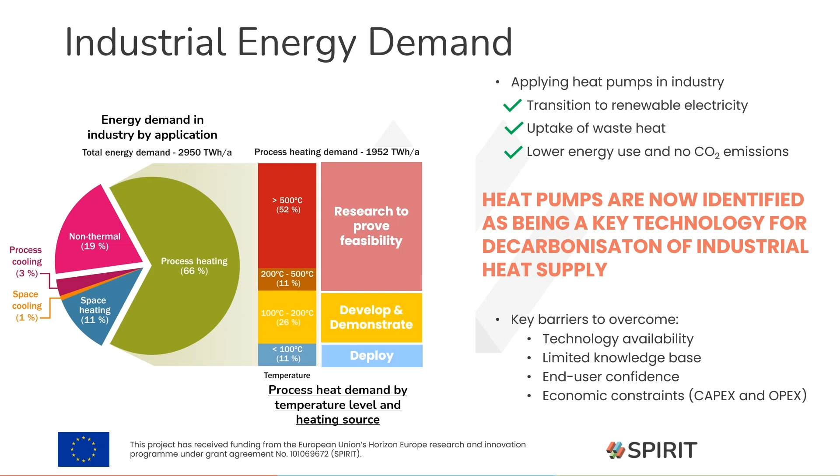So I mentioned in the last slide that heat pumps are now identified as being a key technology for decarbonisation of the industrial heat supply. Just to show this isn't just my opinion, I wanted to provide some references. In the EU Net Zero Industry Act, a framework for accelerating the manufacture and uptake of clean technologies, heat pumps are identified as a strategic net zero technology, along with other technologies such as wind, solar, batteries, and electrolyzers. This means there's significant potential for rapid scale-up of manufacturing to contribute to the EU's decarbonisation targets. We can also look to the IEA, for instance, who recently released a report on the future of heat pumps.

In this report, it indicates that heat pumps, which can efficiently supply heat to industry, are the key technology to make heating more secure and sustainable.

Also from the IEA, they recently released a report for a net zero roadmap for the global energy sector. In this net zero roadmap toward 2050, heat pumps were identified to account for 30% of the heat demand in light industries for 2050. Just to give some context of what that means, this would be equivalent to rolling out 500 megawatts of heat pumps every month over the next 30 years. So clearly, there's a lot of potential, and it's exciting times for heat pumps in the industrial sector.

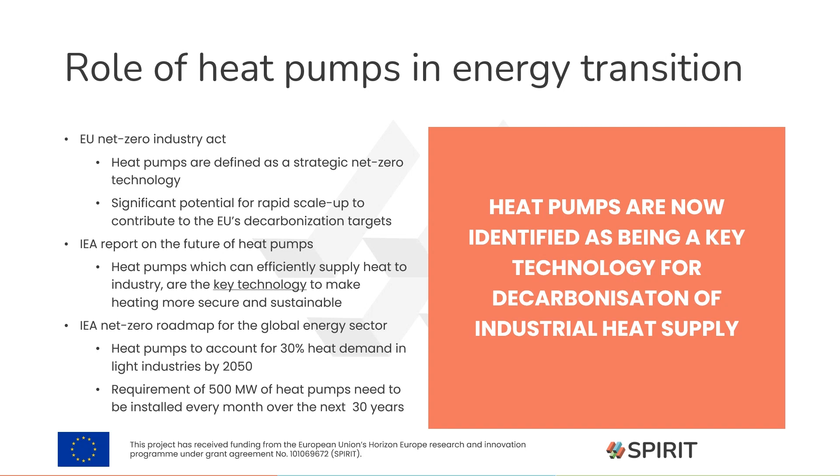The final place where this viewpoint is shared is in the recently released Horizon Europe framework, where we see an increasing number of calls on high temperature and industrial heat pumps. One of these calls was in 2021, titled 'Full Scale Demonstration of Heat Upgrade Technologies with Supply Temperatures in the Range of 90 to 160 degrees Celsius.'

And this is where we submitted the Spirit proposal. Spirit stands for implementation of sustainable heat upgrade technologies for industry. And of course, this project was eventually successful, which was very nice news.

We started working on the project in September 2022, last year. The project has a duration of 42 months and will continue till 2026. We have 17 partners from 8 countries, and the total budget for the project is 11 million euros, I think it's well over that, with an EU contribution of around 9 million euros.

Within Spirit, we have the overarching objective to establish heat pump technology as the reference low carbon technology for industrial heat supply less than 160 degrees in 2030, by carrying out the following sub goals or objectives.

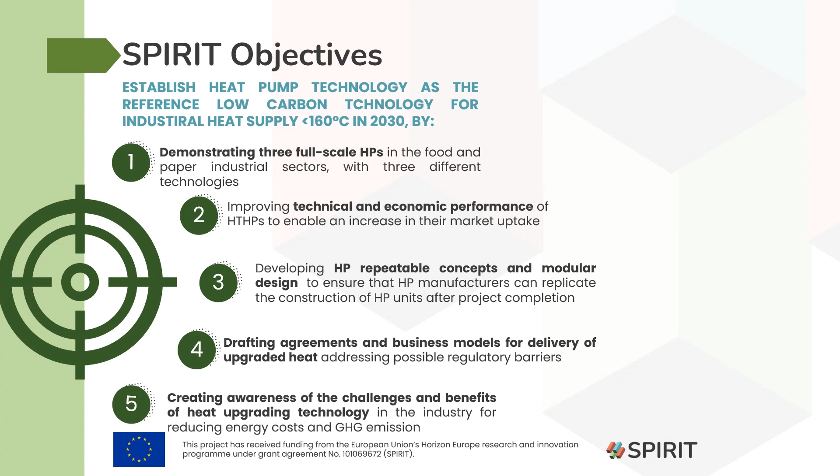As a final point, it's really our ambition as part of Spirit to take the learnings that we have from this project and disseminate it to a wider audience. So we really want to say not just what the benefits of industrial heat pumps are, but we also want to identify or inventorize what the challenges are for heat upgrade technologies and how we can overcome these. I think that's a really important part as well.

In terms of the consortium that will work on these objectives, what we've tried to do is incorporate all sorts of areas of the value chain. So what you can see here is, in the first instance, we have technology suppliers. For instance, we have

the heat pump manufacturers such as Spilling, Mayekawa, and GEA. We also have TVP Solar involved in the project, which manufactures vacuum plate solar collectors. So we want to see about the ability to incorporate solar thermal heat combined with heat pumps into the process industries. We have 3 end users involved in the project, namely Smurfit Kappa, Stella Polaris, and Tiense Suiker, where the

heat pumps will be demonstrated. We also have a number of knowledge providers, which will support the manufacturers and the end users in this. For instance, we have TNO, DTI, and DLR, which are heavily involved in the demonstrations, but also in technical developments. We have Danish Technical University, which will be involved in looking for the replication potential for this technology in the district heating sector, and TLK Energy, which will develop integration and heat pump design tool chains, which will be available to the public, which take a lot of the learnings of Spirit and incorporate it into those design and integration aspects.

We also have parties on the business support aspect. Synlock will develop the innovative business models, as was discussed in a previous slide, and we'll have Eurek Research conducting a market study for industrial heat pumps under different scenarios and seeing how that market will evolve moving towards 2050.

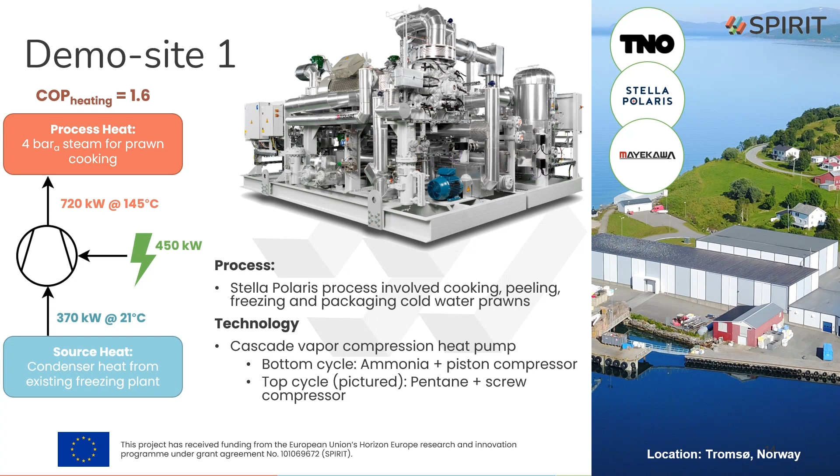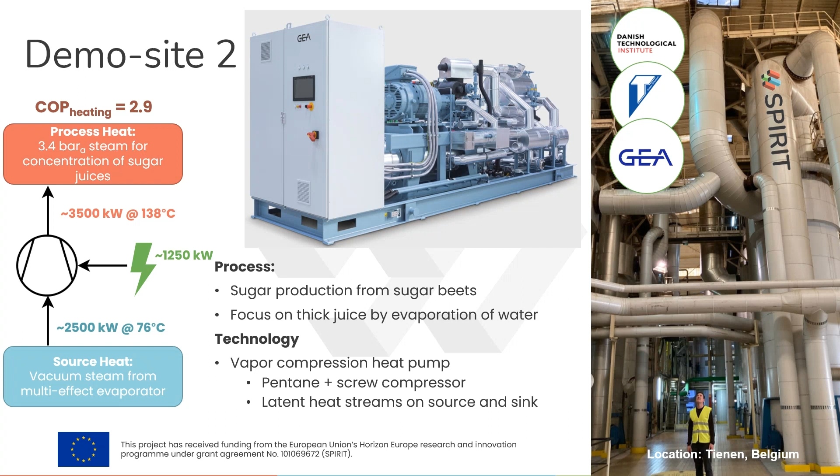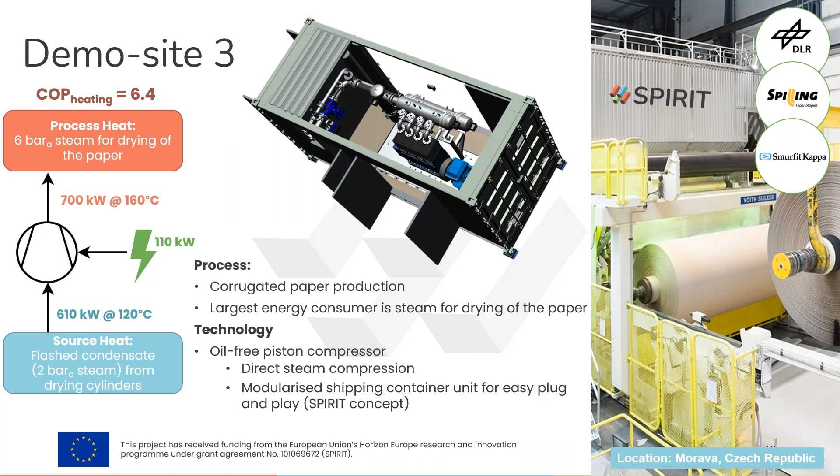I hope this is giving a nice introduction to the Spirit project in a public forum.

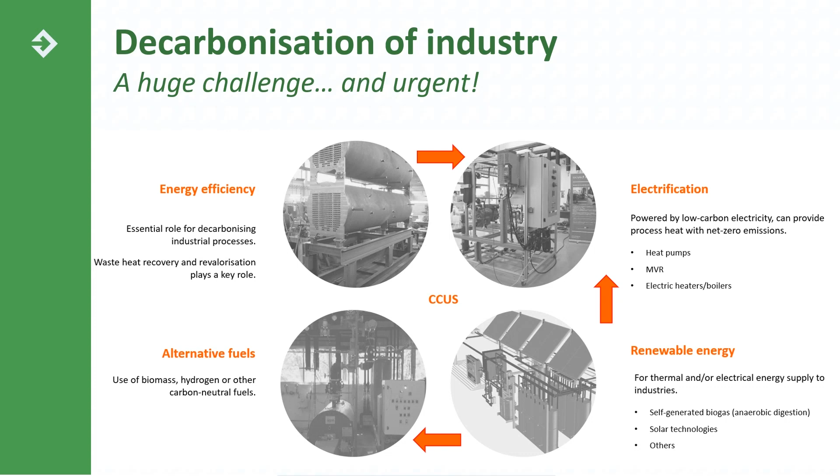Industry plays a key role due to its high portion of CO2 emissions coming from industry, and as well, as Andrew has said, high temperature heat pumps can be key. One of the technologies, together with other technologies, other energy interventions and other energy actions, it can play - it can be one of the key enabling technologies towards the achievement of these decarbonization objectives.

Not much to say here, Andrew has said it already. We are talking about using a technology that can make use of some heat sources that otherwise are wasted, to produce heat that can be used in the processes, industrial processes, just reducing the energy consumption from fossil fuels.

Maybe just to add something else - I think we are talking about a cross-sectoral technology. We are not just improving the energy efficiency, but as well, at least when talking about electricity-driven heat pumps, it helps to use more sustainable, greener electricity.

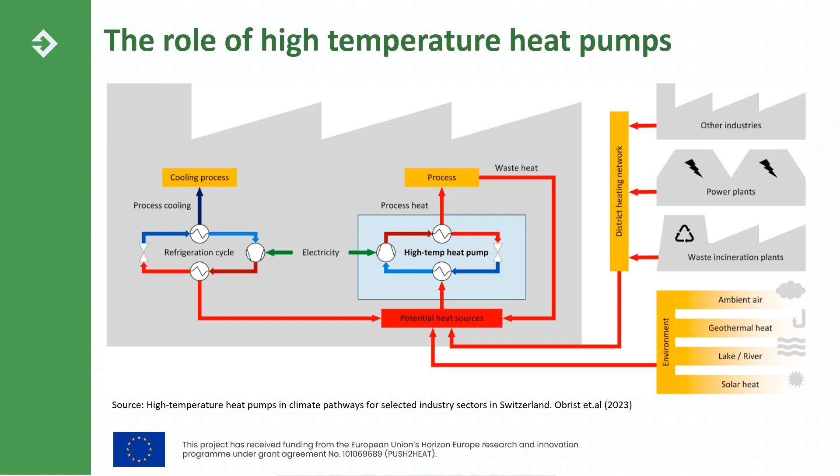Well, probably we all know about the main benefits that are linked to these technologies, so I'm not going to extend much on this, just a couple of figures before going more into details about the Push to Heat project. From one hand, talking about process heat, around 37% of the process heat required by all industry in Europe is below 200 degrees centigrade. So we have a lot to do here.

Depending on the output temperature, the maturity level for high temperature heat pumps is not the same. It's not the same if we are talking about delivering heat at 120 degrees centigrade or delivering heat at 200 degrees centigrade.

So the maturity level is different, but there is a kind of agreement that heat pumps can be a powerful, strong technology to tackle this process heat up to 200 degrees centigrade, more or less. And we see that the market potential, or the amount of process heat that we can reach through heat pumps, is really high. On the other hand, regarding available waste heat, it's not easy to estimate this, but there are some studies estimating this available waste heat in the industry.

In fact, I have taken this study that comes from TNO, and they estimate that there is more than 200 terawatt hours of waste heat between 40 and 100 degrees centigrade. So heat pumps are like a perfect match between these. We have a lot of waste heat available. We have to decarbonize the thermal processes. So let's do it. But the truth is as well that the potential seems to be high, but still the actual market is not too high.

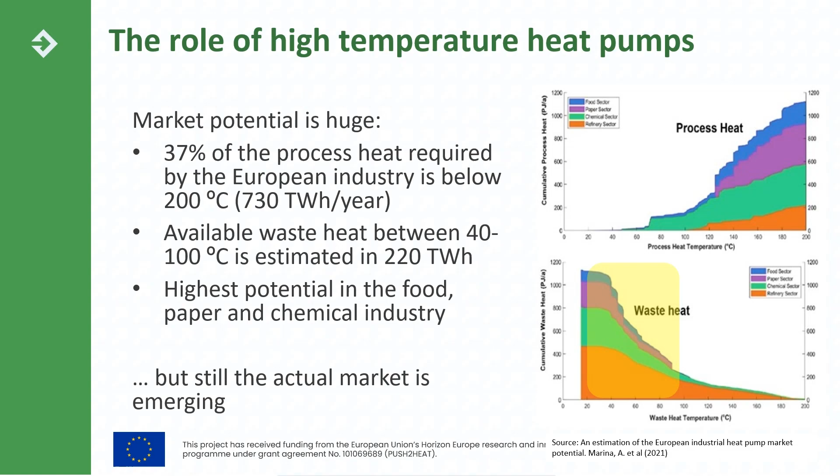Let's say that it's emerging, and probably many people that are here today in this event know better than us that there has been a change in the market trend in the last couple of years. It seems the interest in heat pumps from end users and from the different companies in the value chain is increasing a lot. So it seems there is a change. But still, the truth is that the actual market is not so high, but the potential is there and the need as well. So I would say this is a little bit like the starting picture for the Push-to-Heat project, and it was conceived based more or less on this framework.

So I'm going now to focus a little bit more on the project itself. I have summarized a lot the objectives of the project, and I would say we have two main pillars. Of course, we are talking about technology, so it's a technological project, but not only. We are considering 4 different heat upgrade technologies. I will talk more on this later. So we are talking about improving the technologies. We are not developing new technologies, but we are talking about optimization, upscaling, further improvement, or whatever.

But, as said, it's not just a scientific or technological project. We also want to tackle very clearly market and business related objectives. So the idea is to push forward this market potential that I have just mentioned, that in principle is high, working on new business models and any action to help these technologies deploy in the market in the next years. So these are the two main pillars of the project, but at the end of the day, the core activity will be the demonstration of 4 full-scale pilot plants in different industrial applications.

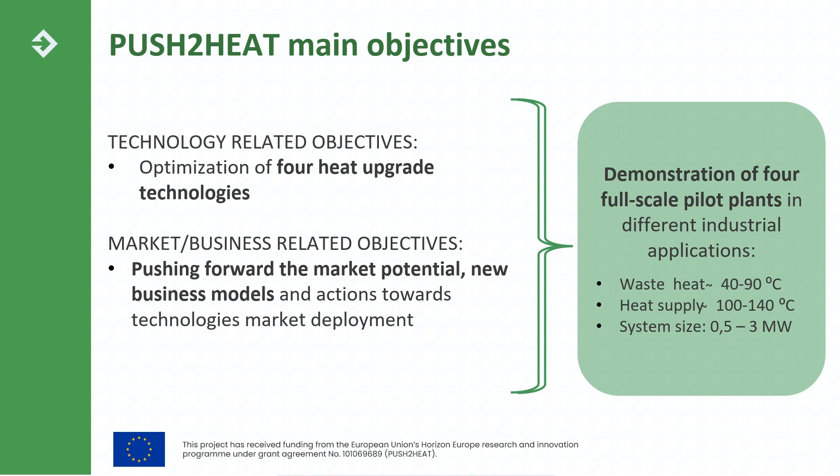And in summary, the main features are these ones that we see here. Regarding waste heat, we are using waste heat from 40 to 90 degrees centigrade. Regarding the heat supply, we are talking about delivering heat at between 100 and 140 degrees centigrade. And regarding the system size, we have demo sites starting from around 500 kilowatts of delivered heat up to around 3 megawatts. Okay, so this is an overview of the main objectives.

And regarding the involved technologies in the project, as said, we are considering four different technologies that will be provided by four manufacturers, and we are considering electrically driven heat pumps, but also thermally driven heat pumps. In electrically driven heat pumps, these are the vapor compression cycles. On one hand, the manufacturer SPH from Germany will provide a vapor compression heat pump with a piston compressor. On the other hand, we have Enertime from France, that will provide vapor compression heat pumps with turbo compressor, so for larger scale.

And in thermally driven heat pumps as well, we are considering 2 different technologies. On one hand, an absorption heat transformer with water lithium bromide as working fluid by BS-NOVA from Germany, and also a thermochemical heat transformer by Q-Pinch from Belgium. Yeah, and this is an overview of the technologies that are involved and will be demonstrated in the project.

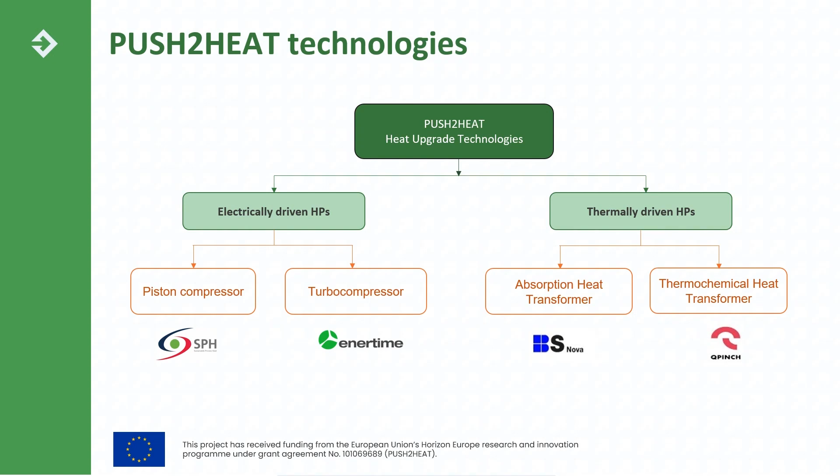Okay, and then regarding the demo sites, we have 4 technologies and we have 4 demo sites, 1 demo site for each technology. So one of them will be implemented in a paper industry in Germany, in the city of Weissenborn, and the plant owner is Felix Schoeller Group. And here the heat pump by SPH will be the one that will be demonstrated. The waste heat source will be exhaust heat from the paper machine dryer.

So they have a glycol circuit already implemented from the exhaust humid air heat recovery circuit, and they were already using this heat for space heating, but still they have more waste heat available. So the idea is to use this waste heat to activate this heat pump to produce low pressure steam at 1.8 to 2.2 bar approximately. So here we are talking about quite an important temperature lift, probably not as high as one of the demo sites that has been explained by Andrew and is part of Spirit, but a temperature lift of 80 Kelvin more or less.

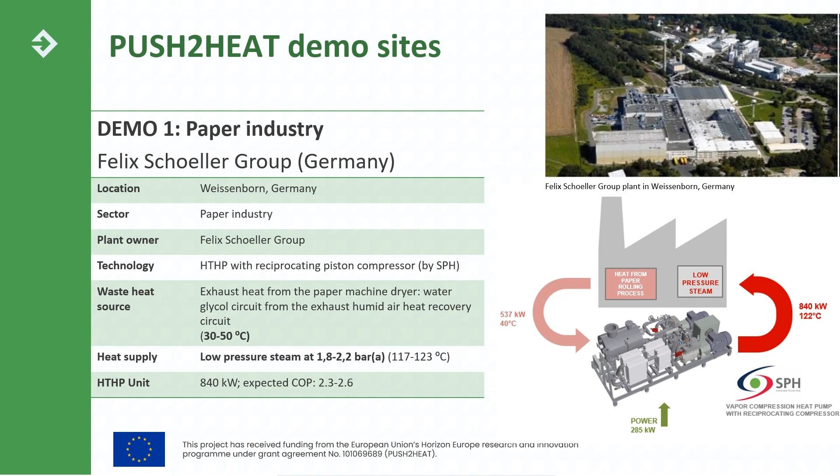And of course, this is translated into the COP as well, but it's expected to have quite an interesting COP. As you know, we are still in the initial stages of the project, so we are still doing the first assessment, energy system concept and so on. So the accurate results will come later on, but we expect a COP around 2.3, 2.6, more or less. And regarding the size, we are talking about a high temperature heat pump unit of about 840 kilowatts of delivered heat.

Okay, we have another demo site. This one will be implemented in Lazio in Italy, close to Rome, in the plant owned by Cartiera di Guarcino, also paper industry. And here a heat pump of around 2.8 megawatts will be implemented, provided by Enertime. In this case, it's a paper industry, and we are integrating it, of course, in the processes. But what I wanted to say is that the waste heat is coming from cooling water of the CHP plant, the cogeneration unit that they have to deliver the electricity and steam that they use.

So it's a paper industry, but this can be replicated a lot in many other industries. They have a lot of waste heat available. So the idea here is to use around 2 megawatts of this waste heat at 89, 90 degrees centigrade, more or less, cooling water. This will be used to activate the heat pump, and the heat pump will produce low pressure steam. Here we are still defining the concept for the energy system regarding how this steam will be used. So far the idea is that part of the heat will be produced at 1.8 bar of steam, and another part at 3.6 bar.

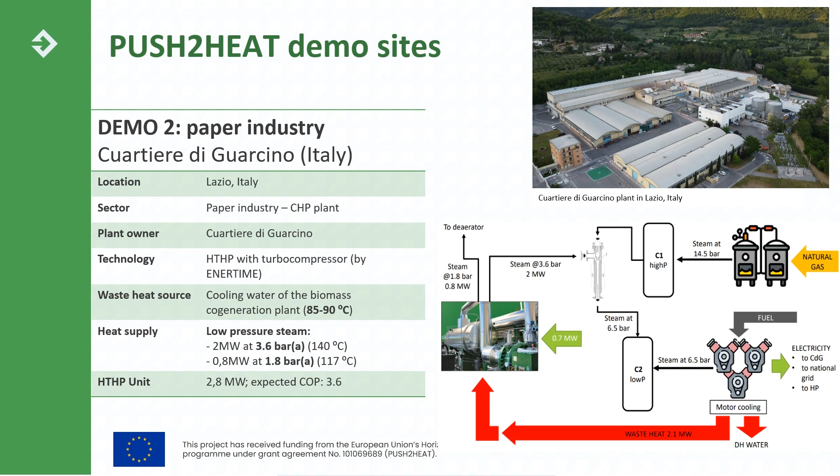So we are still working on this, and let's see in the upcoming months which is the final solution. And here the expected COP is around 3.6, which is a very interesting COP. This is an overview of this demo site. Okay.

The third one will be located in the city of Santander in the north of Spain. It will be implemented in a chemical industry owned by the company Dynasol. And here the technology that will be demonstrated is an absorption heat transformer by BS-NOVA. And the waste heat, here again, we are still checking different alternatives, and it's not fully clear where the pilot plant will be located, because there are two waste heat sources that are very interesting to be used. So that will be decided in the next months.

But the idea is to use a waste heat source that is in the range of 85, 90 degrees centigrade. It will be heat from a condensation process.

So taking this heat, this will be around 1 megawatt of waste heat at around 85 to 90 degrees centigrade. This will be used to activate the absorption heat transformer, and we will get as an output around 500 kilowatts of heat. Depending on where it is finally decided to implement this heat pump, the delivered heat will be used to preheat the chemical product up to 110 degrees centigrade, or can also be used to generate steam and introduce it in the process.

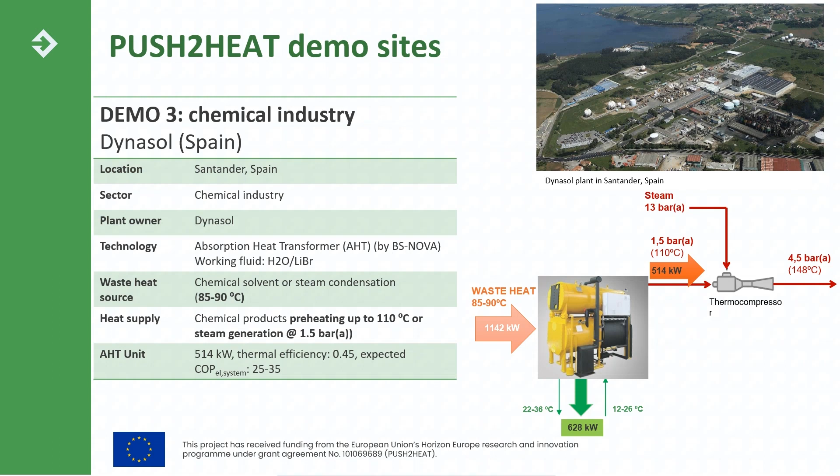Okay, and the fourth one, the demo site linked to the thermochemical heat transformer. This will be a little bit different, also because the story behind the technology is different, and I will talk on this a little bit now. The test for this technology will be done in an R&D plant owned by Qpinch. Qpinch is in fact the manufacturer of the thermochemical heat transformer. So they have these facilities, and the test will be done there.

So here the story is different. The story is that this thermochemical heat transformer is commercially available, but in principle is more suitable for higher temperature levels than the one that we are considering in the PUSH2HEAT project. There are already some installations all around the world that can take waste heat above 100 degrees centigrade and deliver heat above 150, up to 200, or even higher. So this is the most common place for this technology.

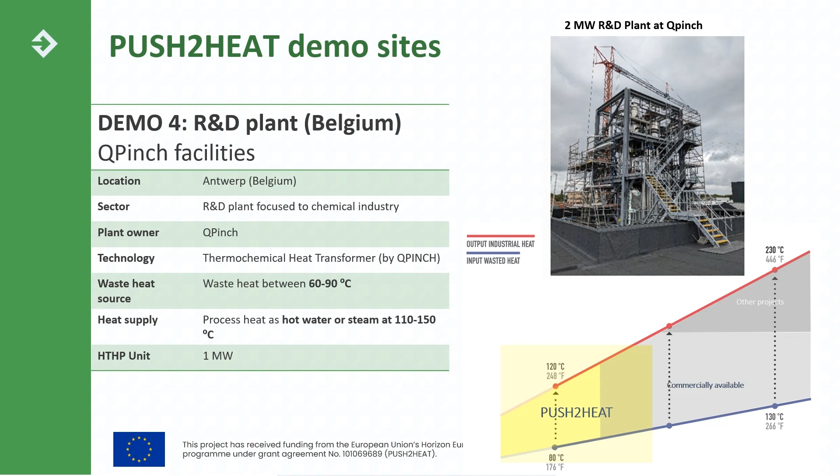Okay, just to finish, this has been an overview of the project and the demo sites as main activities, and I would like to mention a couple of issues before saying goodbye. On one hand, I would like to say something about replication studies. Within the PUSH2HEAT project, the project partners will do some techno-economic feasibility assessments focused on the technologies of the project. What we want is to do this analysis in real cases, not just under generic boundary conditions, but real processes, real boundary conditions.

So if any of you would be interested in doing these replication studies in your plants, in your processes, we would be more than happy to have you on board. Of course we would need some input data, but the study would be for free from project partners to the interested ones. So in case any of you are interested in exploring this opportunity, please contact me, and without any commitment, let's talk about it.

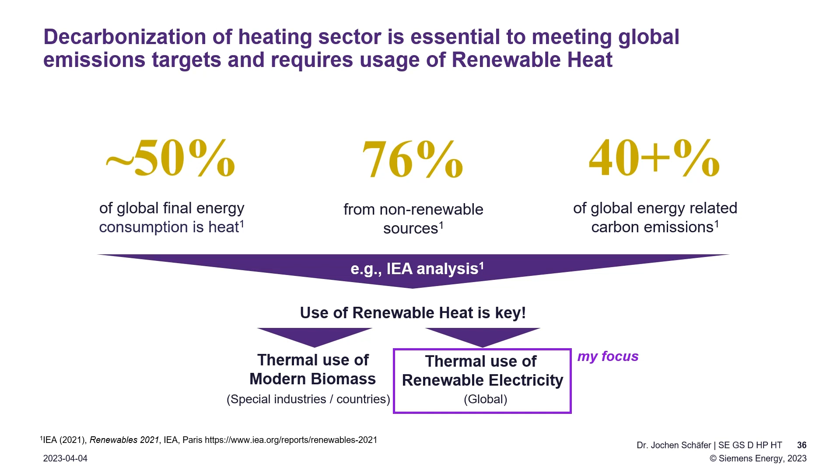So first of all, if we talk about using electricity for heat generation, it's important that we agree on the means of efficiency. So if we want to measure this efficiency, there's a so-called coefficient of performance, which is the ratio of thermal energy at the useful temperature level over the electrical energy that we have to invest to get this thermal energy.

In the public discussion, there are basically three options that are discussed for the future. One, let's call it the reference option, is the electrical heater. There it is a direct conversion of electricity to heat, and the coefficient of performance is about 1.

There is also a discussion of using hydrogen for heating purposes, or even power to X products, like synthetic methane or something like this for heating purposes. There we have to bear in mind that the coefficient of performance will be smaller than 0.75, because we have to incorporate the energy or efficiency factor of the electrolyzer, and after that we can burn this new product, and the efficiency in this term is rather poor.

The smart way, or the energy efficient way, of using electricity for heating purposes is that we use heat pumps. In heat pumps, we use the electricity to pump heat from a lower temperature level to a higher temperature level, and that's why the coefficient of performance can be between 2 and 6, for instance. This is in good agreement with the principles of thermodynamics, because it's really only the electricity that is driving energy, for instance driving a vapor compression heat pump, and here you can basically see the sketch.

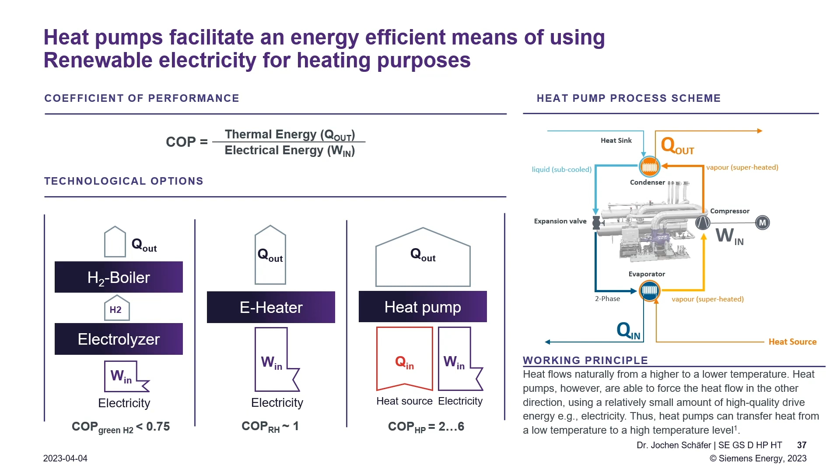So what is Siemens Energy doing about it? To illustrate this, I brought a little sketch. You can see on the y-axis the temperature level, and on the x-axis is the thermal power. Basically we as Siemens Energy start in the single megawatt power range, going up to 70 megawatts per single unit.

With our so-called low temperature heat pump portfolio, we go up to 100 degrees C, and with a high temperature portfolio, we go up to 150 degrees C. Moreover, we have an in-house portfolio for steam compressors, and using the steam compressors, we can then further increase temperature and pressure to about 55 bars and 270 degrees C.

So in summary, we start at about 7 megawatt. We can go up to 70 megawatt with a single unit. We can go up to 150 degrees C with our regular, let's say, high temperature heat pumps.

We selected the working fluid in a way that it has a low global warming potential and zero, or almost zero, ozone depletion potential. We know that there is a critical discussion on synthetic refrigerants, and we as Siemens Energy clearly commit to sustainable business, and we will offer heat pumps based on natural refrigerants as an alternative. However, we see that especially with respect to safety properties, the synthetic refrigerants have been developed such that they have, for instance, no flammability and lower toxicity, and this is something that is very nice for an application.

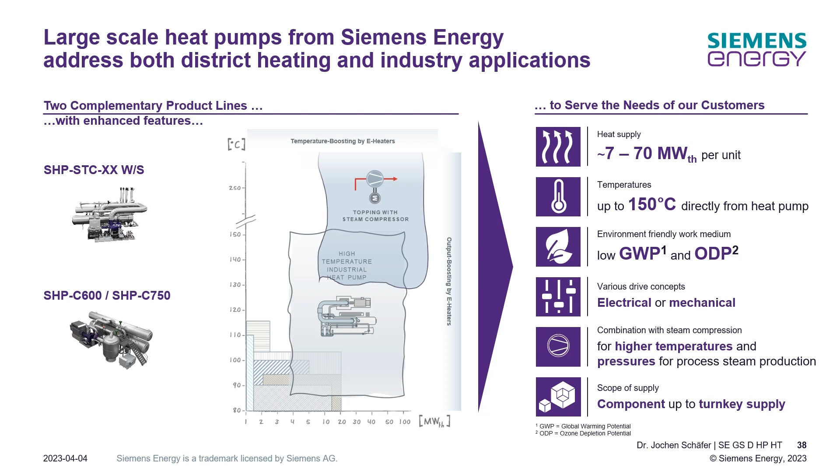We do this development and market it basically for two large market segments. On the one hand, we have the process industries, and on the other hand, we have the continental district heating systems with forwarding temperatures that are higher than 100 degrees C in winter times.

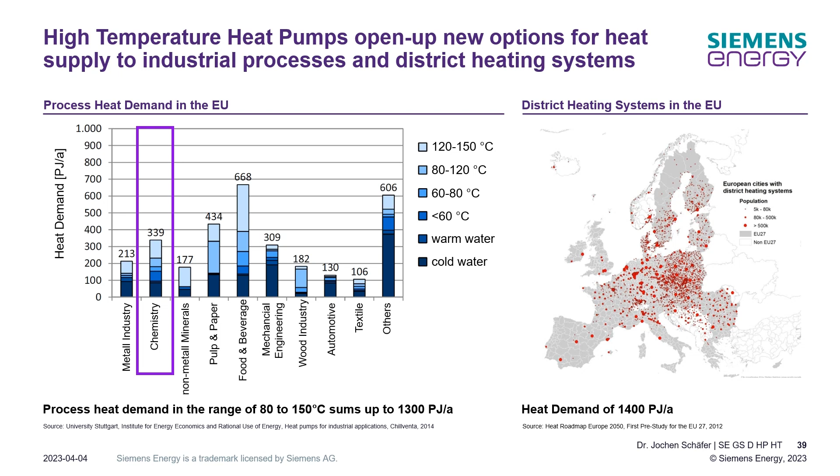But I promised to give you some more details on heat pumps plus subsequent steam compression, and there I prepared some slides showing a case in chemical industries. So let's have a look.

First of all, here on the left-hand side, you can see this is basically the high temperature heat pump cycle. We take some waste heat, for instance, cooling water coming back from a chemical reactor, or cooling water from an entire site primarily going to a cooling tower. We cool it down, and afterwards we can do some feed water preheating whenever there is this option.

We have the high temperature heat pump cycle here, and we produce low pressure steam, something like 1.5 bar.

Steam, and then we have a subsequent steam compression. We do this if needed in a multi-stage arrangement, and we can also do intercooling. Finally, by the last spraying of water, we can really adjust the steam parameters to the parameters that are needed by the customers.

An arrangement such as this has significant advantages. First of all, we can reduce the overall efficiency loss and therefore reduce the primary energy uptake. We can use electricity as main driving energy instead of fossil fuel. Doing so, we can reduce the CO2 emissions, and we reduce the dependence on fossil fuels, which is an additional nice feature given this geopolitical situation that we have so far.

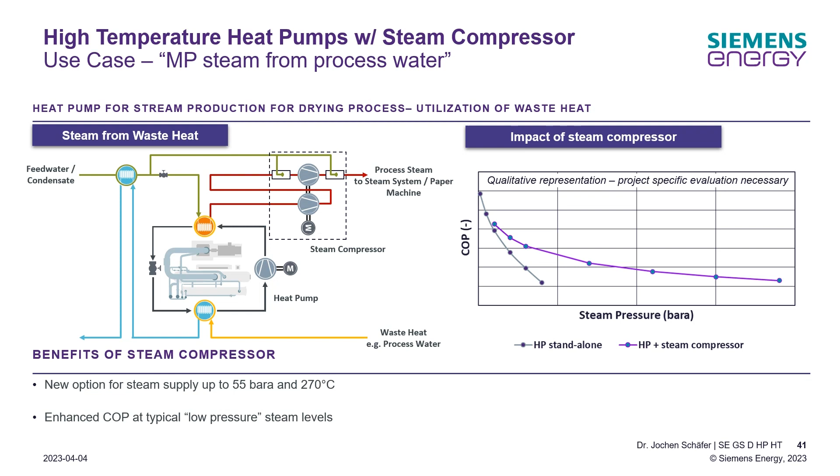Let me summarize my point. First of all, the electrification of the heating sector is key to meeting global emission reduction targets. Heat pumps allow for energy efficient decarbonization of the heating sector. High temperature heat pumps facilitate low carbon heat supply to district heating systems and process industries, and the subsequent steam compression opens up new possibilities for steam supply up to 55 bars and 270 degrees C.

Siemens Energy has, for the low temperature heat pump, a significant track record, and we have advanced products for heat supply at higher temperatures. We would like to be your one-stop shop here, starting with initial assessment of your heat sinks and sources, going up to a heat pump plant that is ready for low carbon operation. So that's what I wanted to tell you, and I'm looking forward to answering your questions.

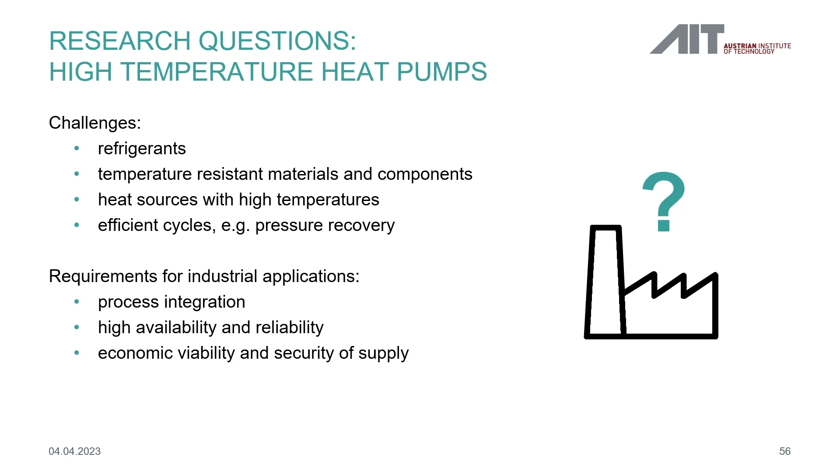First of all, I'd like to introduce you to the DryFiciency Project. This is our flagship project in the field of high temperature heat pumps, where we demonstrated high temperature heat pumps that were able to reach 160 degrees. This project really focused on component development and demonstrating the heat pumps in a real environment.

The third heat pump demonstrated in this project was the research work of our partner in Norway, Sintef. They were working on an open loop heat pump implemented in a biosludge dryer located at Scanship in Drammen.

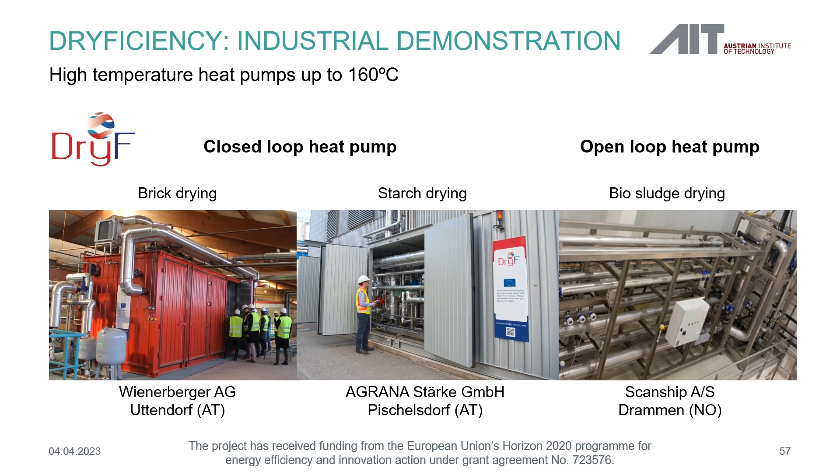This has proven that the component development necessary for these heat pumps was very successful—the compressors, the lubricants, and the refrigerant that was used.

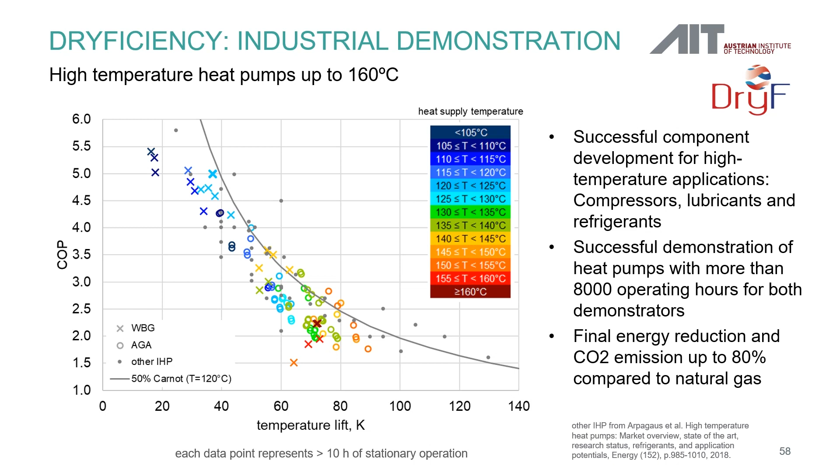I want to show you 3 stages and 3 points of operation in more detail. Starting with the highest temperature at 160 degrees, we had a COP of 2.2.

When we compare this operation of the heat pump with a natural gas burner delivering the same amount of heat, we have a CO2 emission reduction of 62%. We calculated these values using the Austrian electricity mix, which is renewable but not 100% green electricity for the time being. Another important value is the final energy reduction, because this translates into energy cost savings, and this was also in the range of 60%.

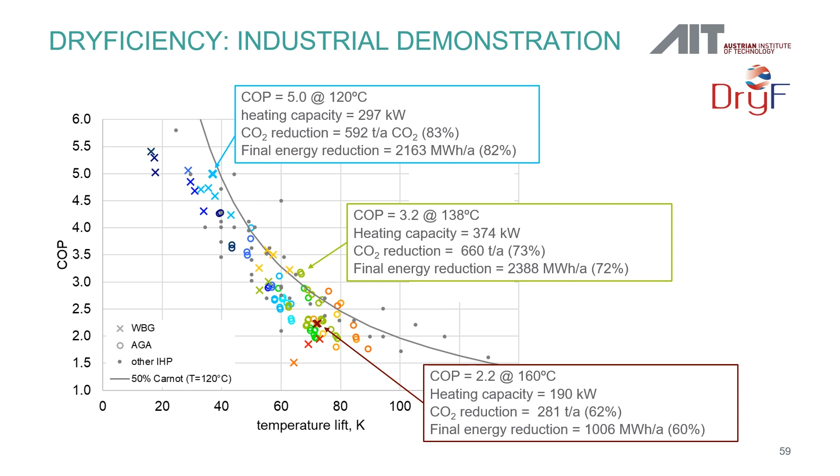When we go to lower temperature lifts, meaning lower supply temperatures while keeping the source temperature constant, we have at a supply temperature of 120 degrees C a COP of 5, which is very attractive. Then we also have very high CO2 emission reductions and final energy reductions in the range of about 80%. This demonstration of the high temperature heat pump was very successful, and it also showed the benefits for industrial companies to integrate a heat pump in their process and make use of the waste heat that otherwise just went into the environment.

We also work on steam generation at AIT, because steam is a major energy carrier in industry, and it has a very interesting multiplication potential because we can integrate those heat pumps that are able to generate steam into existing steam networks, which makes it easier for the end user to switch the energy supply to a renewable source.

We have several options to produce steam with a heat pump. It can be done in the condenser, as we saw in the presentation of Siemens. This is the thermodynamically optimal solution because we have the least number of energy transfer steps — we use the condenser to condense the refrigerant and evaporate the water that is then used as steam in the process. But steam can also be generated in a flash tank, after producing the high temperature with the heat pump. This is also interesting for retrofitting existing water-to-water heat pumps into a steam generating unit. And we can combine it with an MVR system.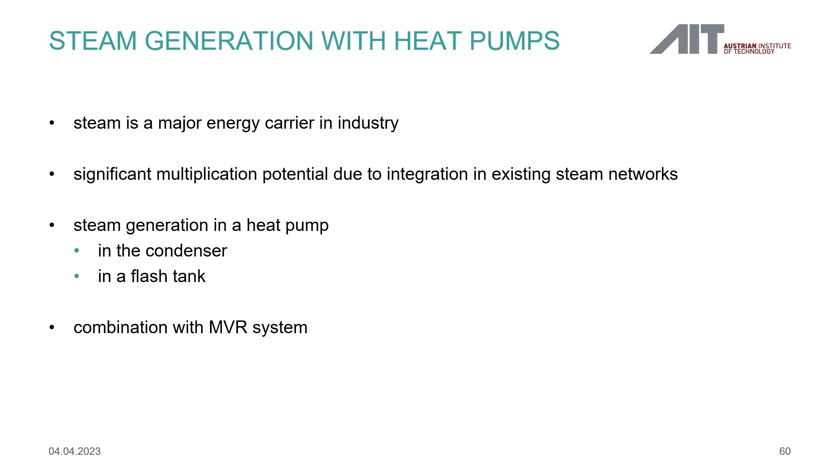I will show you examples of these activities. The first example is the Bamboo project, another Horizon 2020 project where we did a lot of work on steam generation with a heat pump and a flash tank. In this photograph, you see the installation that was set up in the lab of EDF in France. On the left is the heat pump.

It's a water-to-water heat pump operated on a synthetic refrigerant, R1336MZZ, that produces pressurized water. That pressurized water is then used in a flash tank unit especially designed for this purpose, where steam is produced by reducing the pressure of the pressurized water. So part of the water is then evaporated, and the steam can be used for further application.

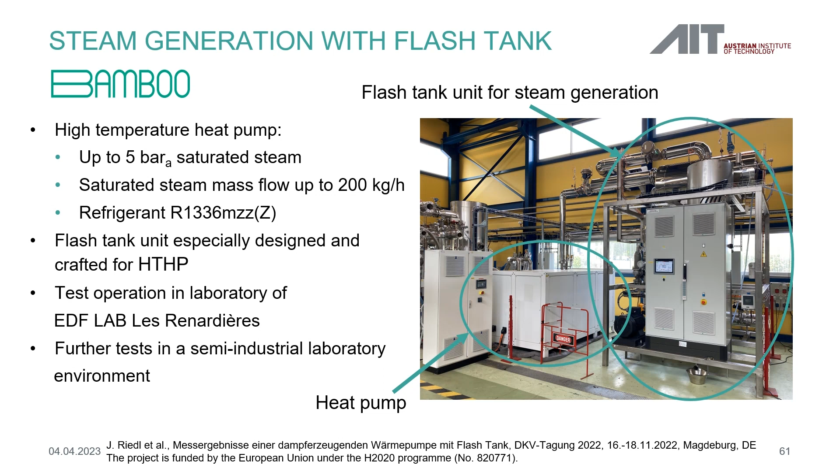With this installation, we have done many different tests to learn about the behavior and the control parameters in this coupled system. In this diagram, you see the steam mass flow on the x-axis and the COP on the y-axis — it's again the heating COP, with the amount of heat delivered divided by the electricity consumed. The colors show the pressure of the steam that was produced, which is basically an indication of the heat supply temperature, since it is saturated steam.

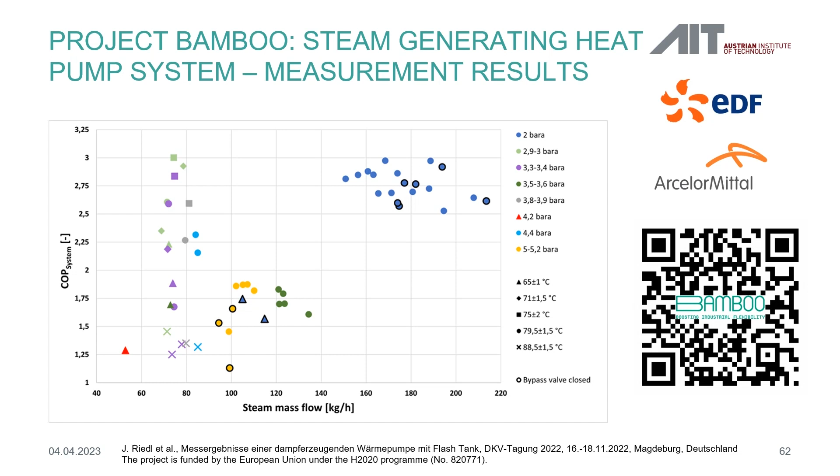The blue dots represent 2 bars, which is 120 degrees C, and the yellow dots are 5 bars, which is 150 degrees C. This was also a very successful demonstration project, and it illustrates how heat pumps that produce hot water can be retrofitted into steam generating units.

Finally, I'd like to introduce our newest project. It's called AHEAD, Advanced Heat Pump Demonstrator. We just kicked it off, starting in December, so it's rather new. There we work on steam production at 11 bar and 184 degrees C based on heat pumps and MVR systems.

This heat pump will be integrated at a production site of Takeda, a pharmaceutical company with several production sites in Vienna, and it will be a major item in their energy supply system. With steam produced by the heat pump, they can reduce their CO2 emissions by 90%, and they can produce totally CO2-free for about 7 months a year. In this project, we will design, set up, and also monitor and optimize this heat pump system for more than 4,000 hours — that's the scientific monitoring.

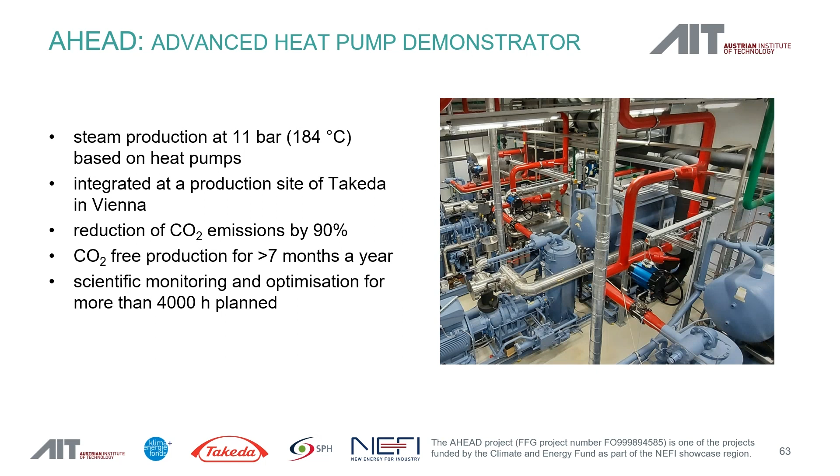Of course, operation will then go on. Here you see how this system looks in theory and what we are going to build in the future. In blue on the left, we have the existing system: they have a central chiller unit where they produce cold utilities, or cold water, for production at a temperature of 6 degrees. The central chiller has waste heat.

So it was equipped with a heat pump, an ammonia heat pump, which produces water for heating purposes at 70 degrees. We use this water at 70 degrees as the heat source for the AHEAD system, which is a combination with a steam generating heat pump. This heat pump is provided by SPH, Sustainable Process Heat, and they will use butane as a refrigerant.

In their heat pump, and the heat pump is based on piston compressor technology. So the heat pump will produce the steam from the water, and then we will add steam compression steps to reach the 11 bar and 184 degrees. The installation will have a heating capacity of 1.7 megawatt, so it's a really big production facility.

And with this setup, we can connect the heat and the cold supply based on a cascaded system of heat pumps that is based on natural refrigerants only. And we will operate this installation with renewable electricity. So this is how this CO2-free production can be achieved.

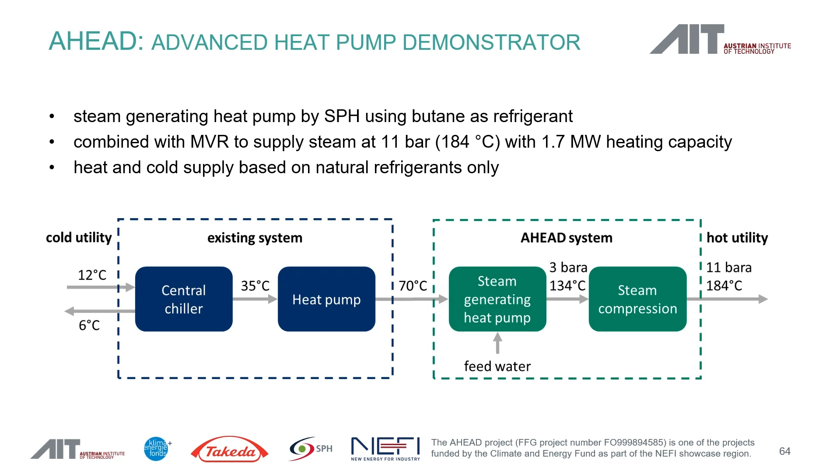This project is part of an Austrian energy model region that's called NEFI. This is new energy for industry. And as a part of this model region, we demonstrate different efficient technologies that are needed to transform the industry into carbon neutral production. And for the end of my presentation, I have brought you another result of NEFI that has been done by my colleagues at AIT and colleagues from University of Leoben. And they work on decarbonization scenarios for the Austrian industry.

So basically, they have defined different scenarios how we can reach zero emissions by 2050. So there were two approaches to get to this result. For the zero emission pathway, this is shown on the right, it was a backcasting approach. So starting from the desired result at 2050, defining the measures that need to be taken to reach that result. The second scenario that's shown on the left, that's called Pathway of Industry. And this was created together with representatives from industry in Austria on the different measures that they are planning to take and extrapolating them to 2050.

So we find different important technology levers in these scenarios. And for today's webinar, the most important one is the one that's listed here in the third place. It's electrification with heat pumps for low temperature applications. So we really find heat recovery with heat pumps in all industrial sectors.

And you can see it also reflected in the results of the total energy demand that is shown in these two diagrams. So the most important section in the bars is the dark blue. That's the electricity consumption. And the diagrams, there's a laser pointer. Great. So this is the dark blue section. That's 2017, 2023. And here we have 2050. And when we compare these levels, we see a doubling in the electricity consumption, and that's not only, but also based on the use of heat pumps.

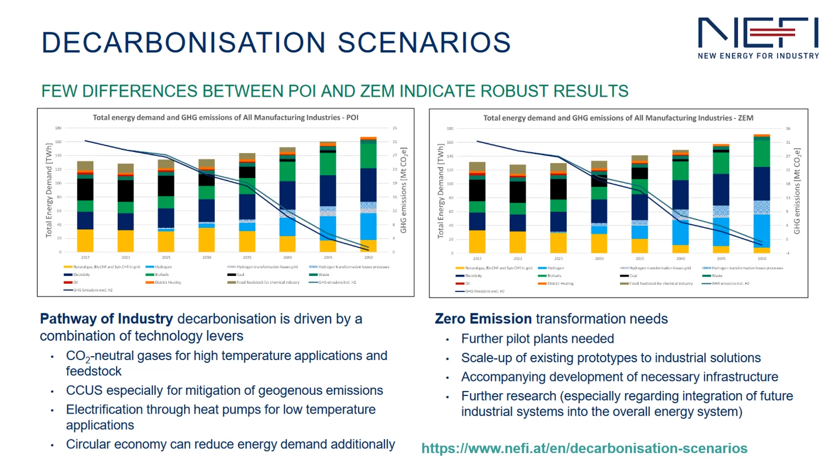In this scenario work, they also listed several measures that are needed for the future. So one of them is we need further pilot plants to demonstrate new technology in industry, also to gain trust and experience with this during this transformation. And if you're interested in the whole study, I've also put the link here so that you have all the information, how it was calculated and what's the background story on it.

So with that, I'm at the end of my presentation. A very short, very generic summary for heat pumps, and I think that goes for all the four presentations that we had today. Heat pumps are a future-proof technology for process heat supply, because with this technology we can reduce the CO2 emissions and increase energy efficiency, which is definitely something that we need to reach decarbonization in the future. And most important, we can electrify heat supply and allow for waste heat recovery, which is also very important to keep the industrial sites operating in the places where they are.

And we've also seen in a couple of studies that integration is most decisive for efficient solutions. It's a very active field. There's a lot of development going on in different research projects, but also among manufacturers and heat pump suppliers. So we see more and more products entering the market. It's a trend towards high temperature and of course steam generation. And demonstration projects, as they were shown today, are an important item to establish these new technologies. And I look forward to hearing more about these different demonstration activities. And I'm also happy to present more information on our activities in the future.

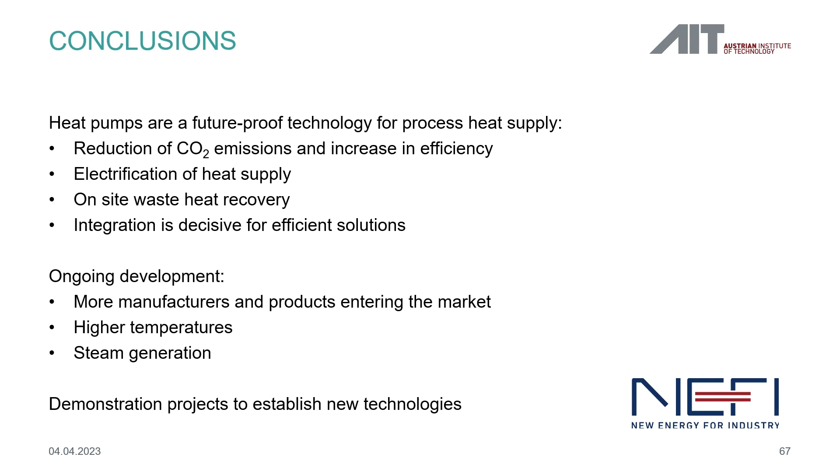Well, I want to thank all the speakers for the presentations. I think now it's the time to ask some questions. So I have some questions for you myself here. I will start with you, Veronica, since I think you're still connected, you're still unmuted. So I wanted to ask you, what would you say is important when integrating a heat pump into an industrial process?

Yeah, first of all, we need to do an inventory of what's possible in this process. So usually when we start a discussion on heat pumps with a company, they have a waste heat source in mind and they have an application in mind. But if we dig deeper, we find other sources that are also interesting. And there also might be changes coming up in the future relating to the process. So temperatures might be lowered, equipment might be more efficient, and this will have an impact on the waste heat that is available. So first of all, it's important to consider all these boundary conditions and then select the right spot to put the heat pump in.

Lovely, thank you. Now, I want to ask a question to Andrew this time. Let's switch the order a bit. So I wanted to ask you if you could elaborate on how the Spirit project overcomes the non-technical barriers to widespread heat pump uptake.